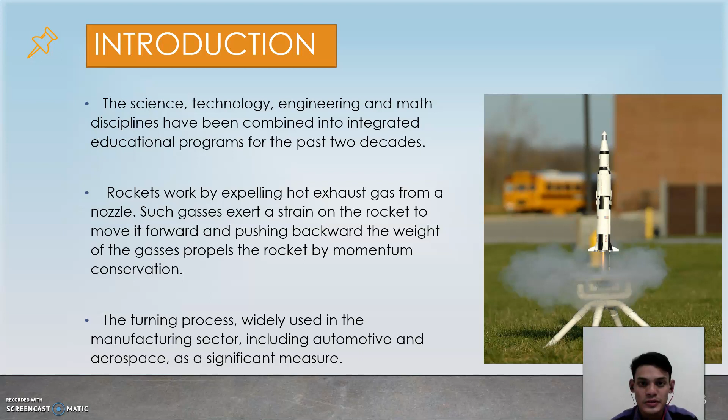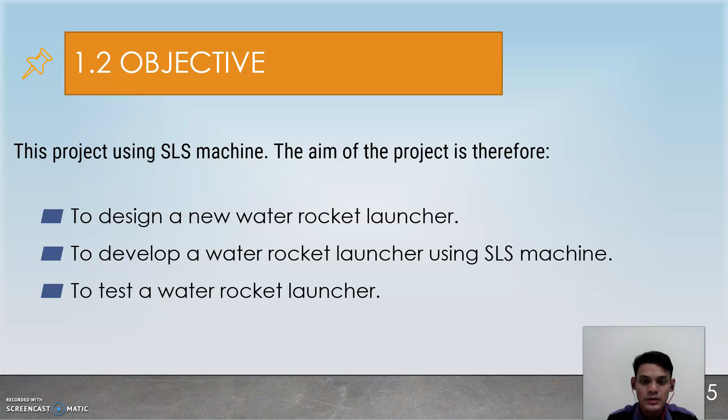For the problem statement, the water rocket launcher nowadays is not relevant and is unsafe to use in school and university educational programs. Then, there is leakage of the liquid propellant, which is water, while waiting to launch the water bottle rocket. The water rocket launcher had just one angle to launch the rocket. My objectives, using the SLS machine, are to design a new water rocket launcher, to develop a water rocket launcher using the SLS machine, then to test the water rocket launcher.

For the work scope, the high pressure air at the launcher and the water pressure in the bottle rocket are determined. The selective laser sintering SLS machine, with the material polyamide, will be used to produce the water rocket launcher. The guide rails will be added to weaken the launch stability of the water rocket.

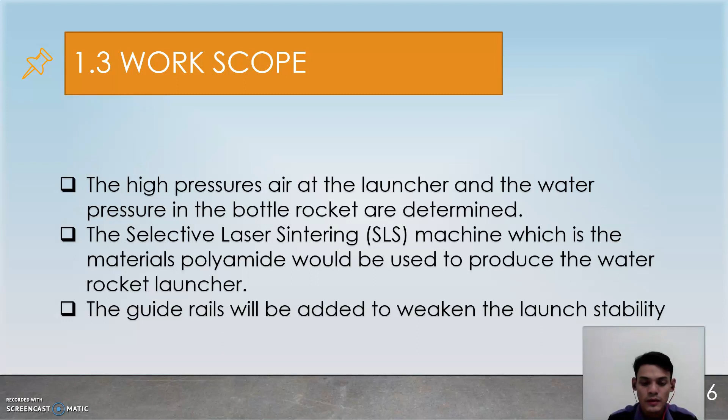For chapter 2, the literature review, in my selected literature, the aerodynamic concept and Newtonian physics are discussed and conducted by means of a workbook on the study and review problems. Then, safety should be the number one priority when designing the water rocket launcher. As the launcher will be handling compressed air, it is important to make sure all fittings are properly rated. Then, the angle when launching the water bottle rocket is the most important, whether or not the rocket is flying high.

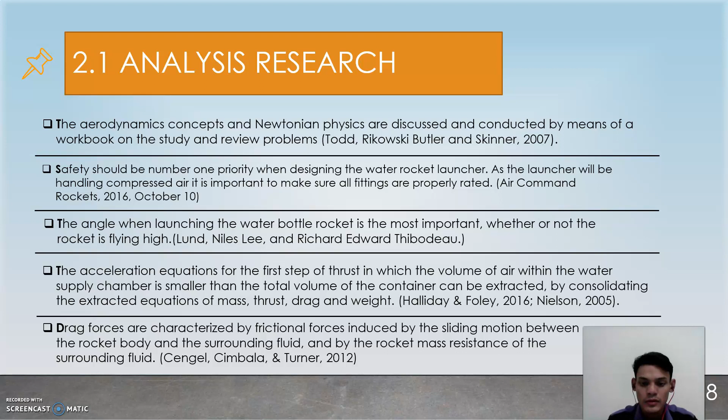The acceleration equation for the first step of thrust, in which the volume of air within the water supply chamber is smaller than the total volume of the container, can be extracted by consolidating the extracted equations of mass, thrust, drag, and weight. Drag forces are characterized by frictional forces induced by the sliding motion between the rocket body and the surrounding fluid, and by the rocket mass resistance of the surrounding fluid.

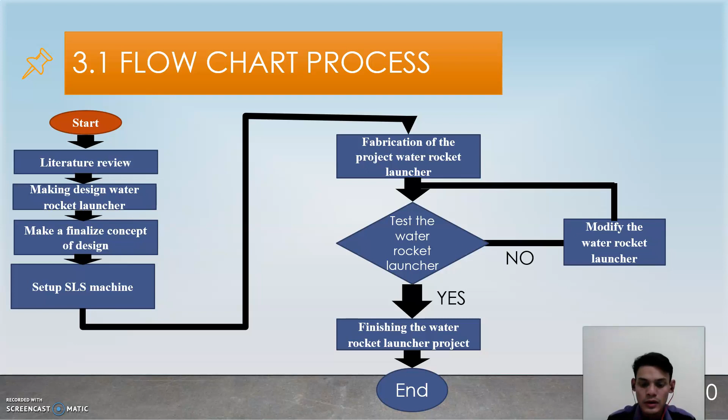Chapter 3, the methodology, includes a flowchart, Gantt chart, and experimental method. My flowchart process is start, then literature review, making the design of the water rocket launcher, then the final concept design, set up the SLS machine, fabrication of the water rocket launcher, then test the water rocket launcher. If the launcher does not successfully launch the water rocket, I will modify it, and if it launches successfully, then the water rocket launcher project is finished. This is my Gantt chart for PSM2.

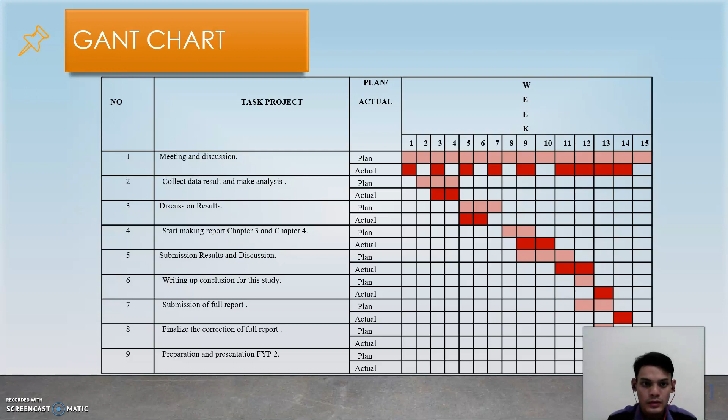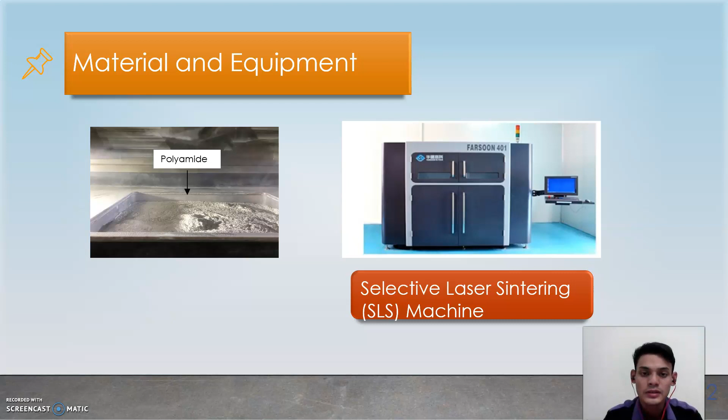Okay, for the methodology, once all parts are cooled, the build chamber was removed from the SLS machine and transferred to the next station, which is to break the powder block manually by hand. Then clean the block with sandblasting, to remove the powder that's still in the holes of the water rocket launcher.

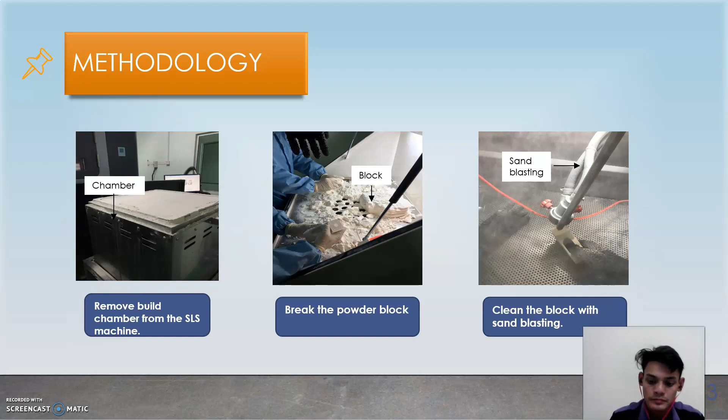Chapter 4 is result and discussion. For the launcher assembly base, this base is more stable, and the installation of a support frame and a horizontal adjustment was made that suggested mounting of a support system, and the starting pad board and the angle could be adjusted afterwards.

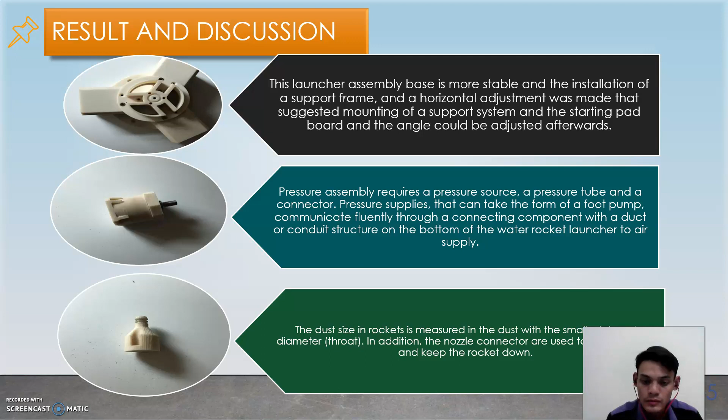For the pressure connector hose, the pressure assembly required a pressure source, a pressure tube and a connector. The pressure supply can take the form of a foot pump, communicating through a connecting component with a duct structure on the bottom of the water rocket launcher to supply air. For the nozzle connector, the duct size in the rocket is measured at the duct with the smaller internal diameter throat. In addition, the nozzle connector is used to supply the air and keep the rocket down before launch.

The next result and discussion is water fill level testing. A water rocket is a rocket type that uses water and air as energy sources. The bottle is filled with water, and then pressurized before launching the water bottle rocket. In this test of the volume of water necessary for the longest flight time, the 40% water rocket flew the longest flight time.

The purpose of this test was to research the volume of water necessary for the longest flight time in the water rocket. The entire experiment used the same air pressure and adjusted just the volume of water. All other experimental conditions were kept the same. For 40%, the average time is 5.41 seconds.

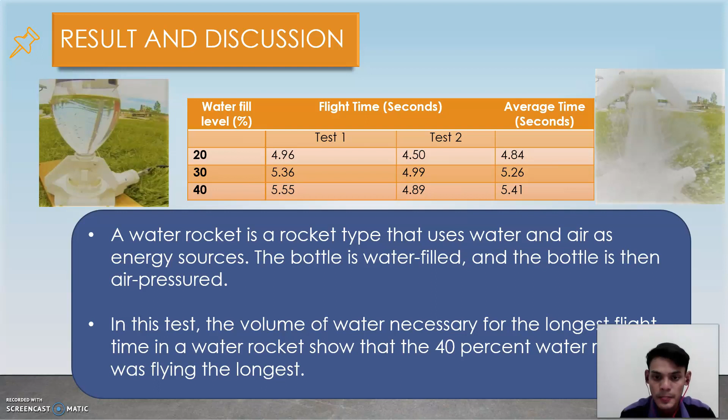Chapter 5 is conclusion and recommendation. For the conclusion, the priority of this water rocket launcher project is safety; this design is safer to use in school and university educational programs, which is the STEM program. Using the SLS machine to make the water rocket launcher will enable engineering to enter many STEM water rocket launcher activities largely in the field. Then, to travel the furthest horizontal distance, the most important components are the amount of air supply and the water, which produce the pressure in the water bottle rocket.

For the recommendations of this project, validate the study using a different method of large testing, then require structural analysis on the water rocket to determine the maximum pressure. Then, to make the water rocket launcher safer, further study of the variables affecting maximum flight is needed.